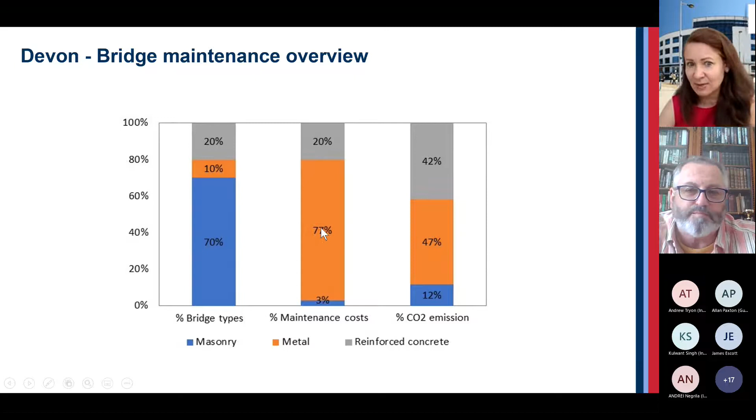This is crazy. And then in terms of CO2 emission, I looked into that. Masonry is about 12%, metallic is 47%, and reinforced concrete is 42%. So a little takeaway from this: maintaining masonry bridges, as you probably know, is not expensive - it's actually the cheapest, and the CO2 emission is much lower than anything else.

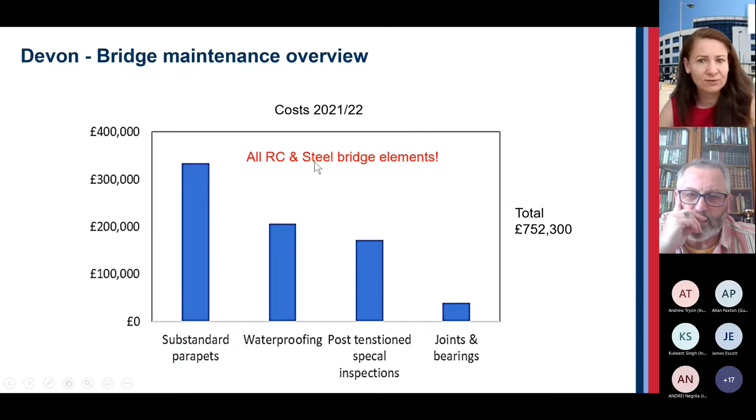So this is just a brief summary of what the maintenance cost is mostly spent on: substandard parapets, waterproofing, post-tensioned inspection, joints and bearings. They're all related to steel and reinforced concrete elements, so masonry doesn't really feature much here at all.

So we all know how long these bridges last, and the last two examples you may or may not recognize. Pont du Gard, I'm sure you do, which is 2,000 years old, and the next one is in Rome, St. Angelo, again built by the Romans. So we have clear examples of masonry bridges lasting 500 years or 2,000 years.

So clearly long lasting. Now, I haven't really come across any new bridges. There have been some brief replacements, particularly in canal bridges, but very, very few, if any, at least in England, and I'm not familiar with Scotland, which are newly built.

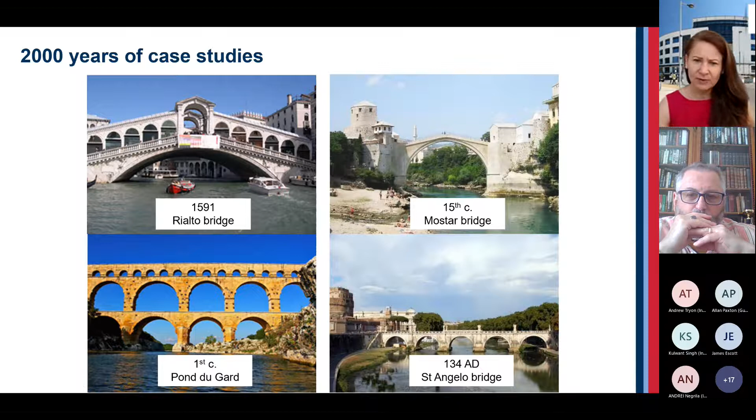Now, I came across a project - well, they haven't been built since the 1920s, so the technology is basically 100 years outdated, and people think that they are too expensive and difficult to build. Now, someone contacted me from Tanzania, actually a Belgian engineer, because they've got an incredible project building 70 new stone bridges.

If anyone has seen any pictures of this, you'd recognize that. Enabel is the Belgian Development Agency. They've got an agriculture project in Tanzania, and within this project they are helping people get to markets.

Working way out in the countryside, they're helping local communities build stone bridges using local resources, obviously. So the initial idea was to build bridges, but after looking into the cost, it was impossibly expensive to build concrete bridges. There are some amazing people in Tanzania among the Belgian engineers and agricultural people.

One of them has been building these bridges for 20 years in Kenya and Tanzania - quite incredible, no one has ever heard of that. So they initiated this project and they're now building 70 new stone bridges in Tanzania, in the northwest region, and the project has been very successful.

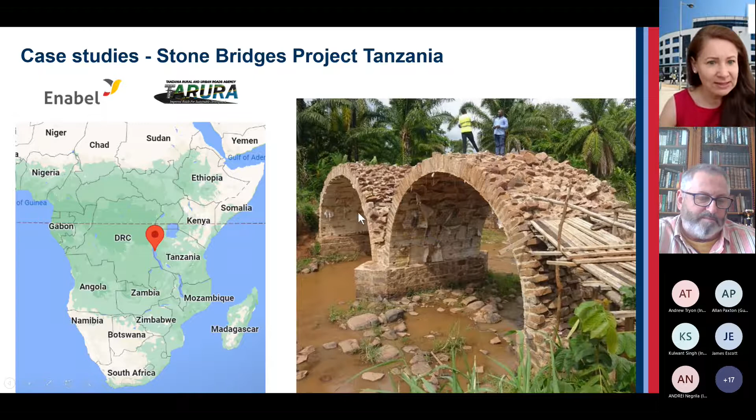So they are now starting to build stone bridges all around the country. That means 70 built within a 2 or 3 year project, and now they're rolling it out all across Tanzania - literally hundreds of stone bridges coming up. I was very interested to go there in November last year and see how they're actually doing it.

Everything is done by hand. There's no electricity on board, and they're obviously using very simple technology - long tapes for setting out.

The local community provides the stones and digs the foundations. The Belgians then pay for stonemasons to build the bridges, and they keep very strict quality control during construction.

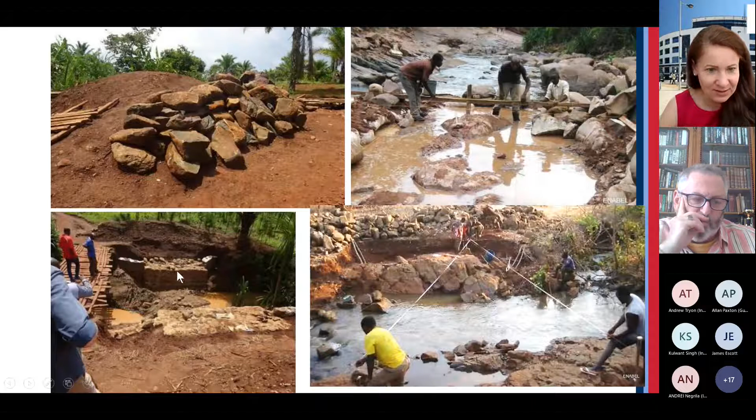So here the foundations have been dug and built. Next step - this is just a step by step. The Belgians provide the centering, deliver it on site, and this is the set for one 8-meter span arch bridge.

Because it's quite a long span, they bring it in 2 sections, one on the left, one on the right. They put it together on site and put it up. You can see the alternative, how local people would cross the river otherwise.

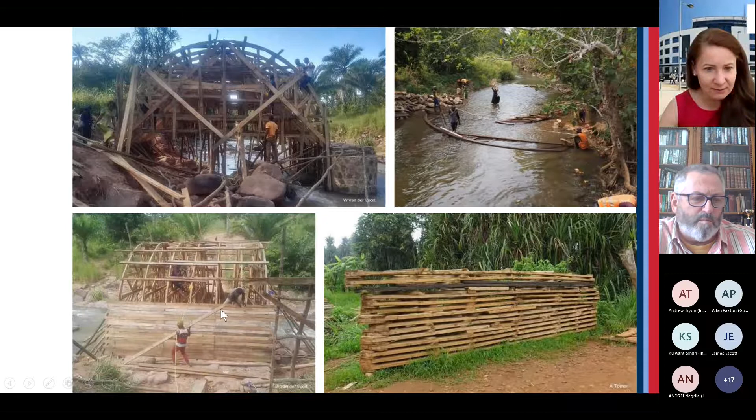They put the sections up - these are sections they secured - and they start putting planking on. After that, they start building the arch.

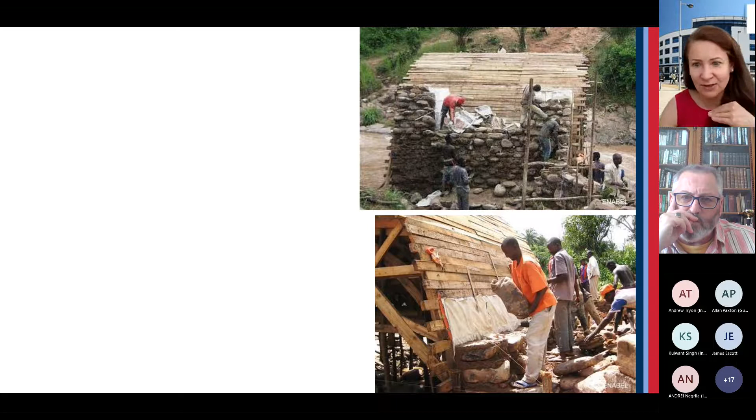They are very conscious about making sure that the largest stones are used for the arch ring, and anything smaller above that. They're also very conscious about making sure there's a 90 degree angle to make sure all the stones are in compression. Here the arch ring is nearly completed, and the last bit is then put in.

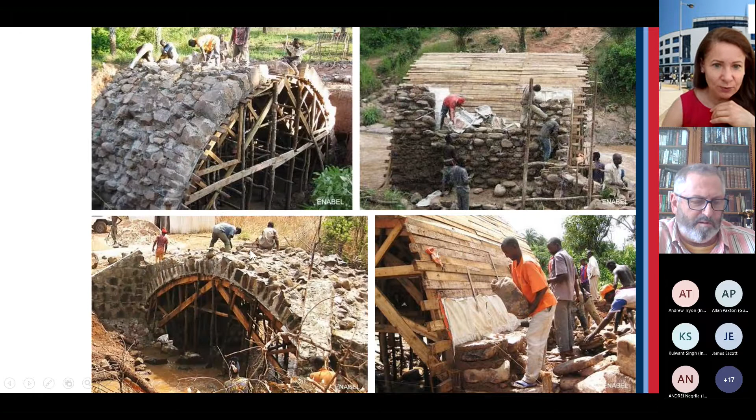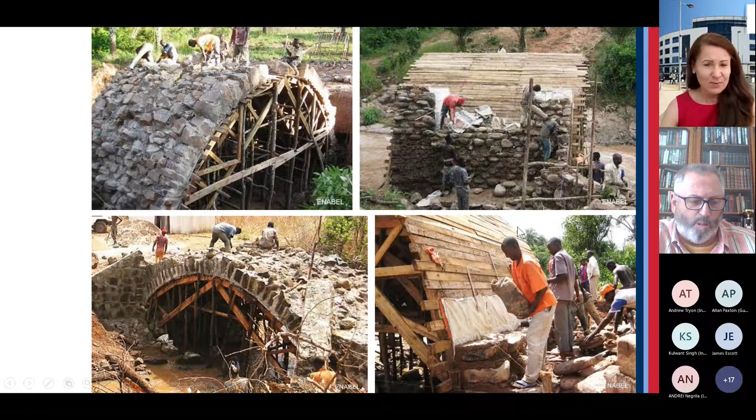It's quite interesting when you talk about what's the ring thickness - it's not easy to estimate. Once they're given the design for the arch with the minimal ring thickness, they try to use stones larger than required, so hopefully most are greater than necessary. However, what the effective arch ring thickness actually is, is really hard to estimate, so when analyzing it you just make the best estimate you can.

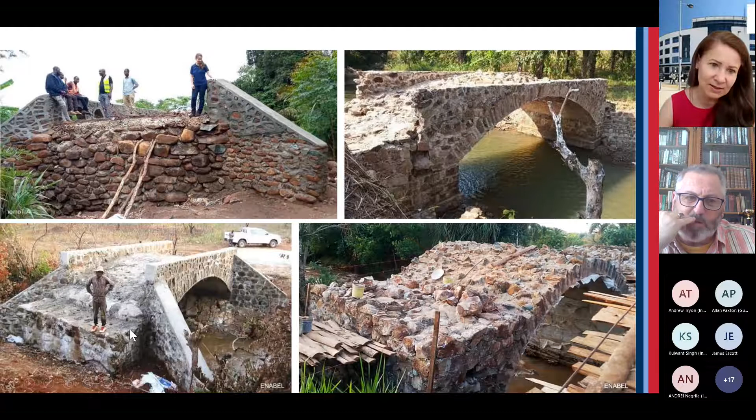Here the arch has been completed and the backing put up. Here the parapet's built - they use very small parapets, but it's just Tanzania. Here's one of those pictures you rarely see, before the bridge is filled up. Here they've got more backing, and then backfilling.

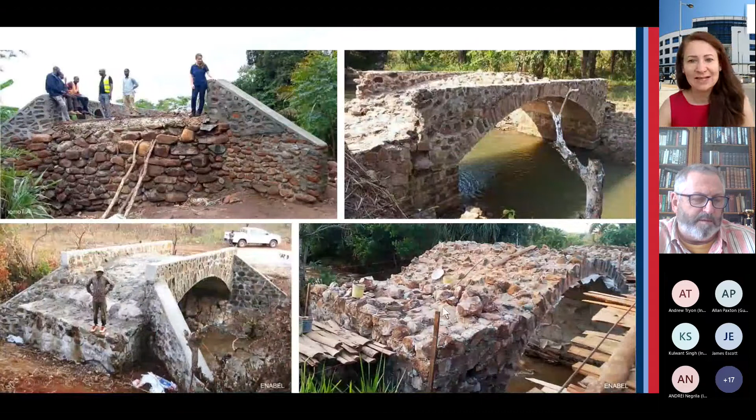And then here's some completed bridges - beautifully built, a lot of them 8-meter span, some smaller, some multi-span. Incredibly well-built bridges, they keep very strict quality control. In one case, I haven't got a picture, but the stonemason didn't put enough mortar between the stones, so they were very keen for that to be taken apart and built properly.

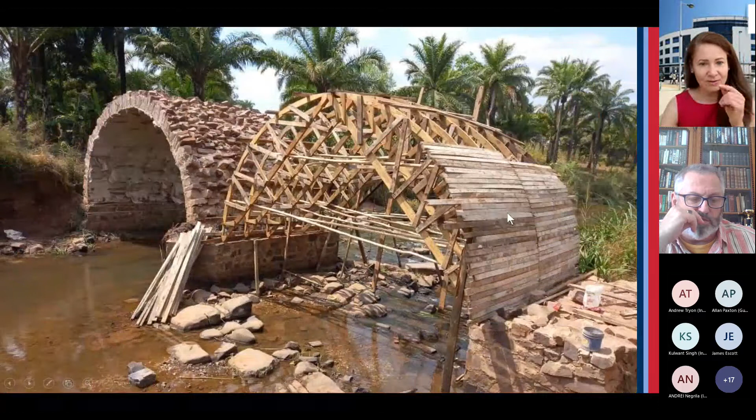What else? Right, this was the two pictures - this one was taken, and this one soon after. How many days or weeks or months do you think passed between the two pictures? How long do you think an arch ring takes to build? 6 weeks? Someone said 6 weeks.

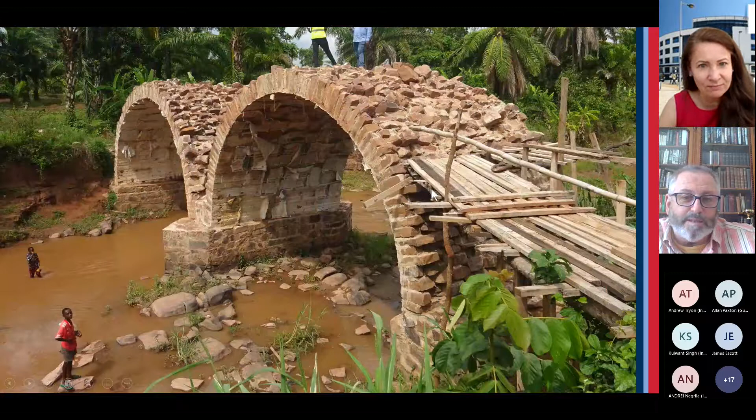Yeah, actually it's 11 days. So they had to finish the planking and then build all the stone, everything done by hand, in 11 days - basically a week and a half to build an arch ring. It's surprisingly quick.

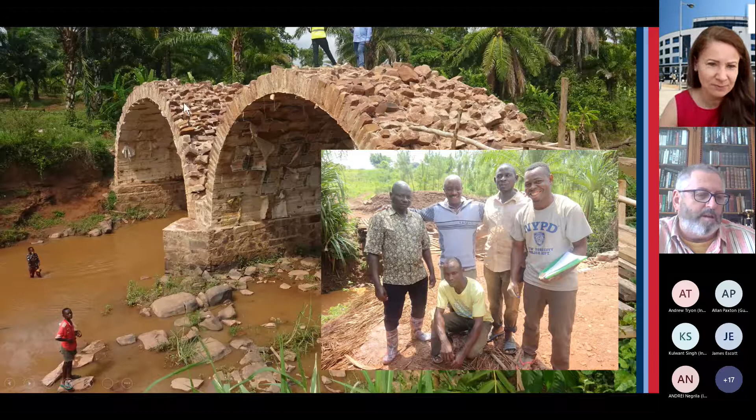So basically 5 guys on site do everything by hand, with the odd helper, but that's the team. They build a bridge in about a month - since this one's 2-span, it might take 6 weeks or 2 months, but certainly not longer. The only reason it would take longer is the monsoon season, when the water level rises by about a couple of meters within hours and they have to stop.

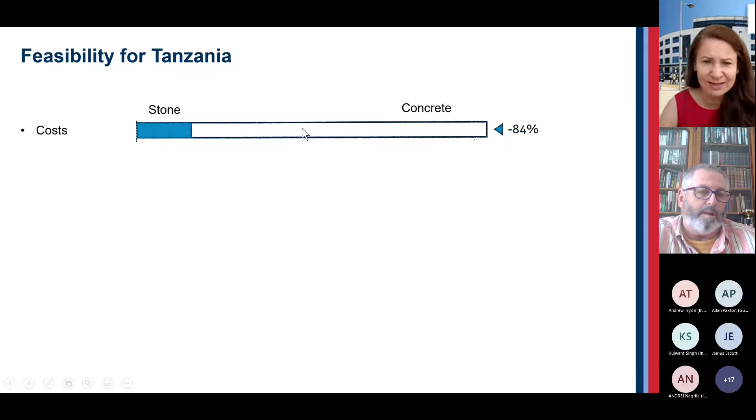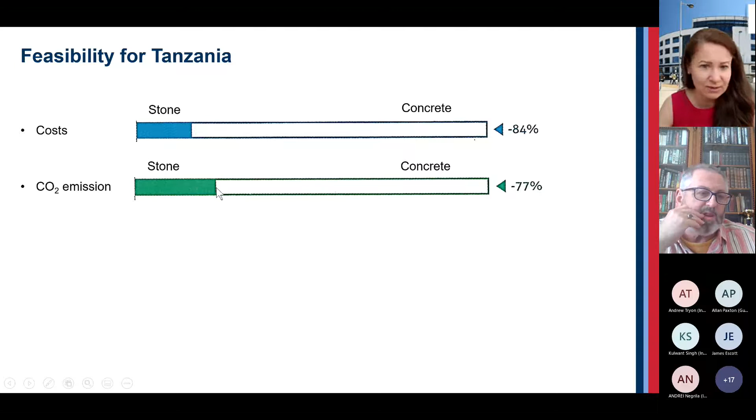This is one of their first bridges, and it was really interesting, really well built, amazing. I mentioned why they selected this type of construction - it was because of cost. Stone bridges cost about 84% less than concrete would, that's in Tanzania, obviously not the UK. Associated with this, CO2 emissions are about 77% lower than concrete, so it's a secondary benefit, but the primary benefit is the cost.

Now, that's a developing country - how is that relevant to us in the UK? When I lived in Bristol, I came up with a proposal to build a stone arch bridge in Clifton, on the Downs, connecting the 2 parts of the Downs park. We got planning permission - that was the first big stone bridge that received planning permission in, I don't know, 100 years, so they were delighted to get it.

The project was then stopped because of another permission we needed, which was to do with the status of the Downs rather than the bridge - they just didn't want anything built on the Downs. The design was for 3 times 14-meter spans. The bridge would have been strong enough for standard highway loading, or it could have been a pedestrian bridge.

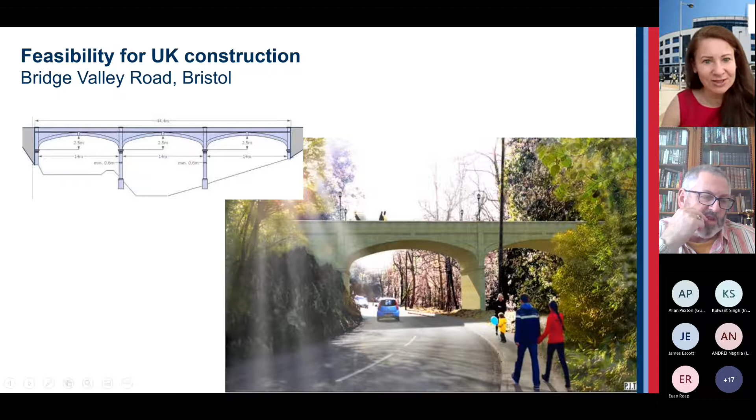I worked on this project on a voluntary basis for 5 years - put the plans together, did the consultation, submitted the plans. It was a really good learning exercise to see where we are with stone bridge construction. Basically no one has done it - anyone who built a stone bridge has basically died, because the last bridges were built in the 1920s. So no problem, we can relearn it - it's just a matter of finding the technology and how to build them.

I looked into the costs, because one immediate thought people might have is that it costs too much. Because none have been built over the last 100 years, it's very hard to estimate - the estimate for a steel bridge for that particular bridge would have been about £1.5 million.

If we built a brick arch bridge, brick masonry, it would have cost roughly the same. If we selected cut stone, it would have cost about 30% extra. So the additional cost is mainly materials and some labor, but labor actually isn't that expensive. You only need a small team.

So it would have cost probably about 30% more. However, stone bridges would last 300 to 500 years, I estimate. Brick masonry might last 200 to 400 years, and steel 100 to 200 years or so, rough estimate.

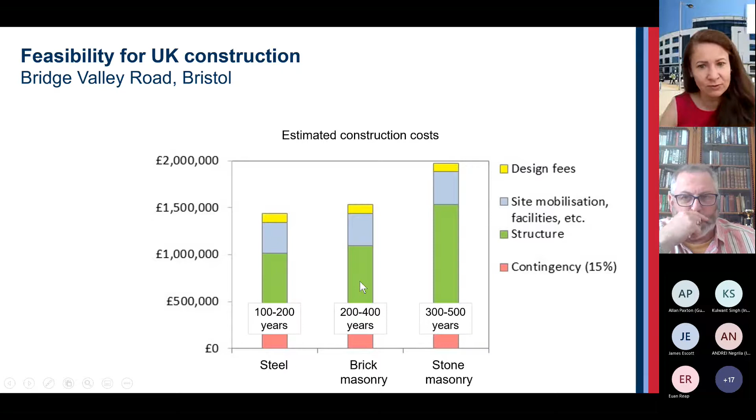Now the government is really keen on embedded carbon. What they're not keen on is actually looking at how long we are building for. I think it makes a difference that you are building something that's going to last 300 or 500 years, instead of something built for 50 years that's potentially going to have a whole load of problems after that.

If you look at the long-term costs per year, the slightly cheaper steel, well, the standard steel would actually be much more expensive if you spread the cost over the life expectancy. So this is one of the issues I'm very keen for government to reconsider, how sustainability is evaluated.

Embedded carbon, to me, makes very little difference in the long term. If anything, it can be counterproductive. We want to make sure things last to avoid lots of maintenance and replacement. Let's build something good quality, requiring low maintenance, that's going to last. And it's much easier to deliver that out of masonry, particularly stone masonry, rather than concrete or steel.

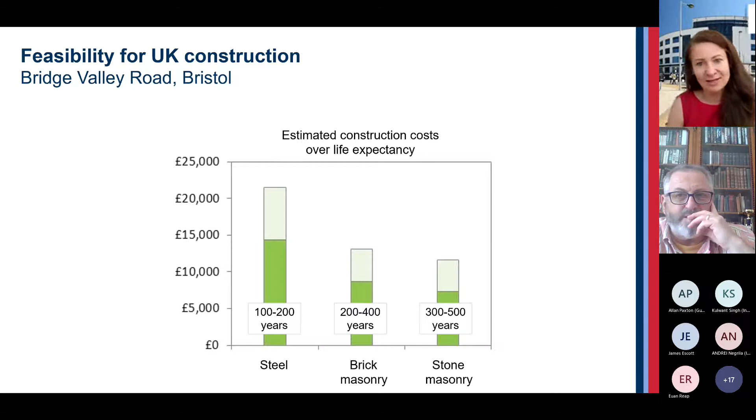Obviously masonry doesn't fit everywhere, so you might have the opportunity to build small masonry bridges, but if you've got a 100-meter span, obviously that wouldn't be applicable. So I'm not suggesting we need to replace concrete and steel with stone, because that wouldn't be true, but I'm suggesting stone has the potential to be used wherever it is suitable.

Looking at environmental impact for maintenance, steel and concrete have roughly the same CO2 emission over the maintenance phase. I'm not talking about embodied carbon, I'm talking about maintenance during the estimated, let's say, 120-year life expectancy, and masonry is about a quarter.

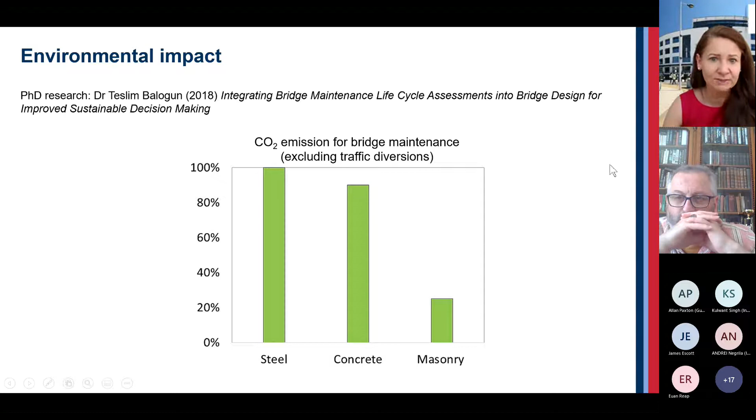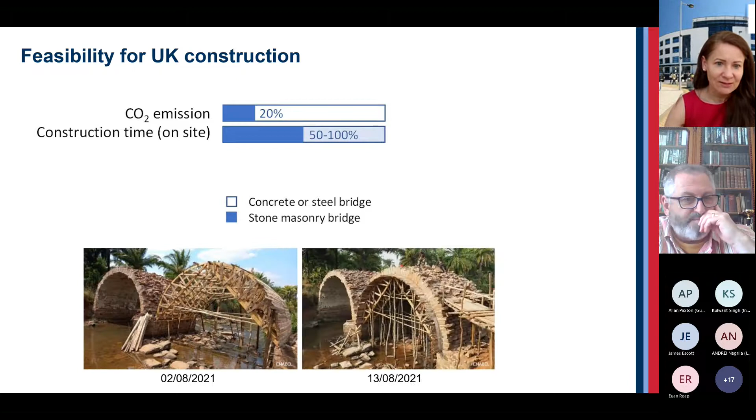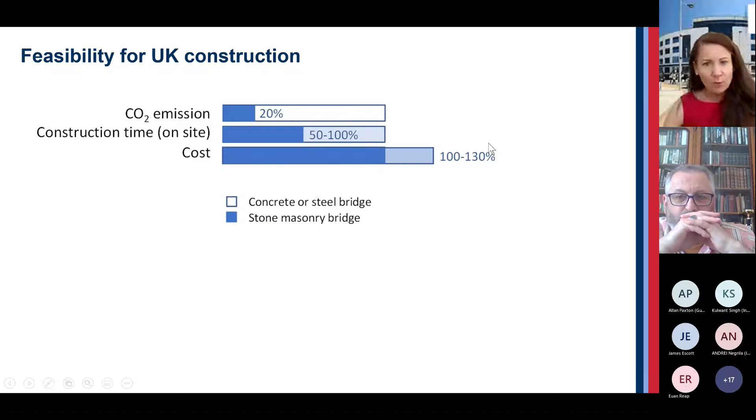And the third aspect, costs. I mentioned about 30% extra, perhaps, but what if you are out in the countryside and you haven't got cut stone, but you've got rubble? Rubble is just as good. So you could use waste material from quarries to build stone bridges, similar to the Tanzanian designs. The cost of stone will be minimal.

You can almost get the stones for free, because a lot of the quarries who produce cut stone can't use a lot of the waste. So the waste is about 40% of cut stone production. So 40% of all stone is put back into the ground.

Now you could probably get it quite cheaply. And for random rubble arch bridges, it doesn't matter what size the stones are, as long as you've got some large ones which you use for the arch ring, and you put the smaller pieces on top.

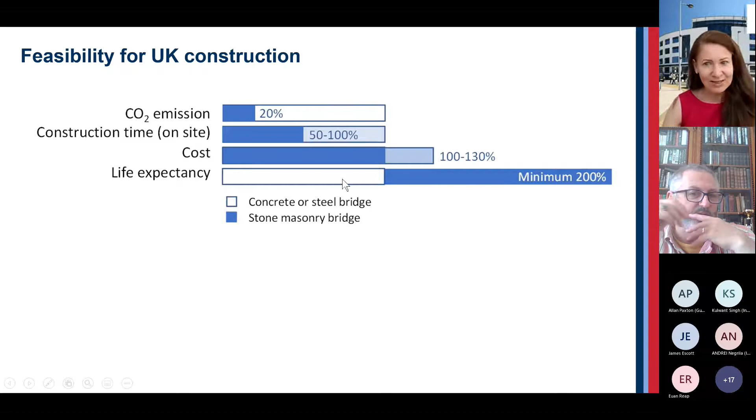Life expectancy I mentioned, and it lasts probably twice as long.

Now, how does it fit in, and what is the business case? If you like masonry bridges, it might be challenging to persuade someone who doesn't know anything about stone bridges why this might be feasible, or that this might help, in terms of environmental impact. So that's an upcoming aspect, obviously, for any construction.

So environmental impact needs to be realistic. A 120-year design life doesn't fit all. It might be realistic for concrete or steel, but why 120 for masonry, when the Victorians built to last forever? So I think the life expectancy must be included into any new design.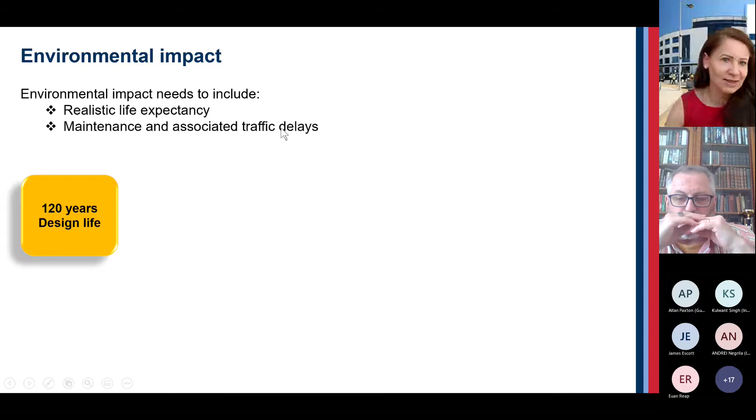But it has to be a realistic design life, not the design life on paper. We also need to include maintenance and associated traffic delays into any estimate for environmental impact. So instead of using the 120 years design life for estimating environmental impact, my suggestion is to estimate the real life expectancy, whether it's 50, 120, or 300 years, and use that to evaluate the environmental impact. This must be included somewhere in the design.

It's not policy at the moment. There's actually no central policy on how to do it. There are suggestions, but most of them focus on embedded carbon. Maintenance tends to have actually the same carbon impact as the embedded carbon, so reducing the embedded carbon endlessly doesn't really make much sense.

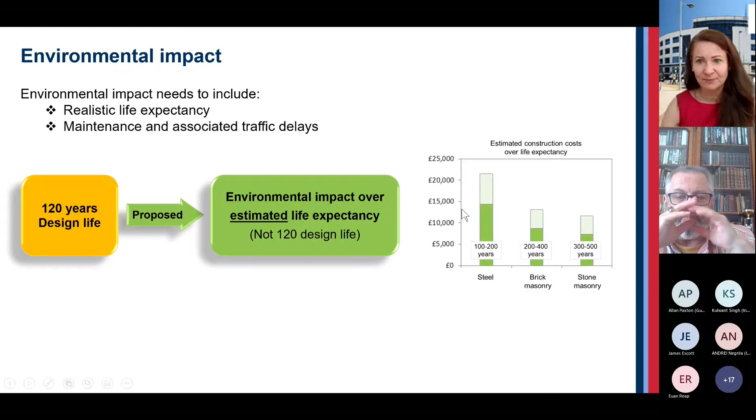And you've seen this picture previously. So it's okay - in terms of a business case, you might argue that it is a long-lasting construction, it is low emission, but how can you actually do it?

It's so clever. You can give it to someone in a local village, and it tells them about the principle of stone bridges, how to build them, with lots of pictures showing correct and incorrect approaches, what to do, what not to do, how to build it step by step, how to build your stone bridge.

And then it also gives them tables, and the tables include everything - like how many wheelbarrows, how many gloves do you need, how much timber do you need. The centering is given to the local community for these constructions, so they build the centering, then take it down and take it back to the warehouse.

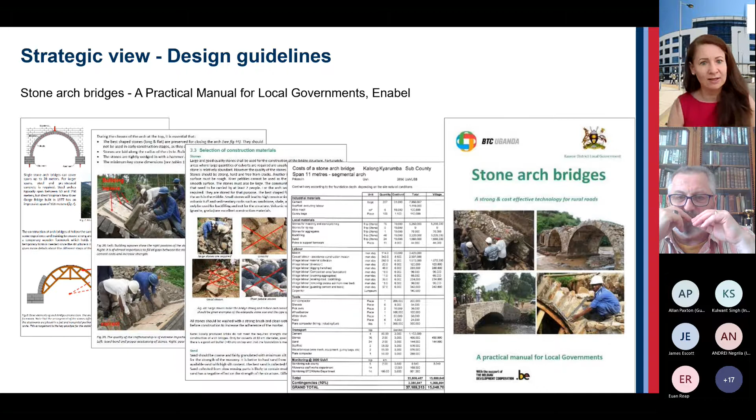Now, if you are interested in Scotland in starting to build these bridges to reduce costs, you might start to think - actually, if we have a few sets of timber centerings, we might be able to just borrow that for a couple of months, take it back, and someone else can use it. That would radically reduce your construction costs.

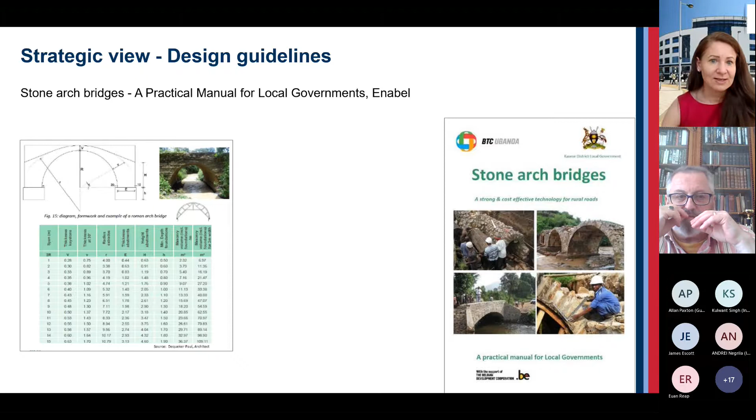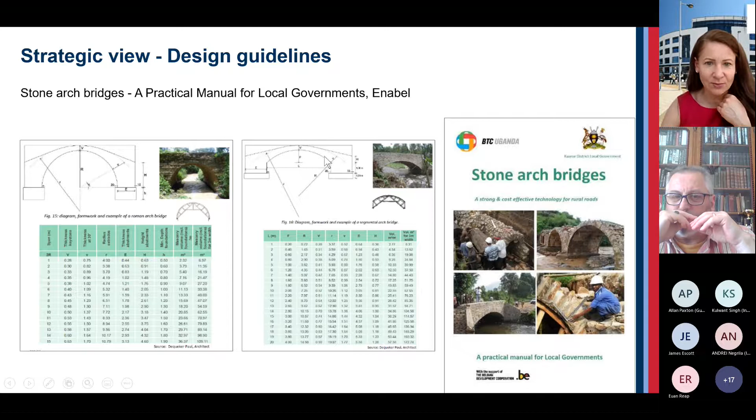And the best thing that they do in this manual is having those two tables - one is a table for semicircular bridges, and one is a table for segmental bridges. Let's have a quick look.

So here you will have the span, ring thickness is V, and then you've got the abutment lengths, the backing heights. So they give you all the information, all the dimensions you need, and that's what they use. So the Belgians, if they want to build an 8-meter span bridge, they can make it either semicircular or segmental, and here are all the dimensions. Incredibly simple, and that's what you need to make it easy for people to do it.

We are looking to organize a working group, and if anyone is interested, please let me know, to update this guideline to become an international one. Obviously materials and local requirements would be slightly different, but I think these tables and the whole setup of this design guideline are incredibly helpful.

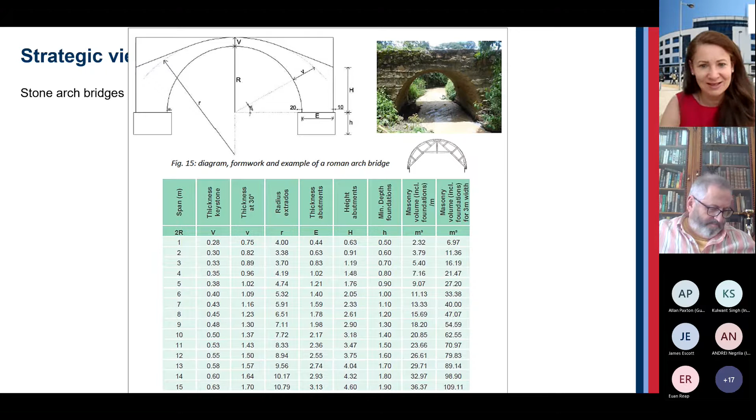So let's look more strategically to the future. Sustainability is well known, whole life costs - that's obvious - long life expectancy, obvious, and resilience. Traffic has gone up enormously since the Victorian times; those bridges are still serving today's traffic because they were over-designed. I think it's a good idea to over-design structures, but reducing everything, minimizing everything - which is the current trend in design and for architects, minimize everything - I think can be counterproductive.

For masonry bridges, the arch ring, like this, is the load-bearing element, and the thicker it is, the stronger the whole bridge will become, more or less. So it makes sense to make it slightly thicker so that you add an extra, I don't know, so many tons, and an extra 100 or 200 years of life.

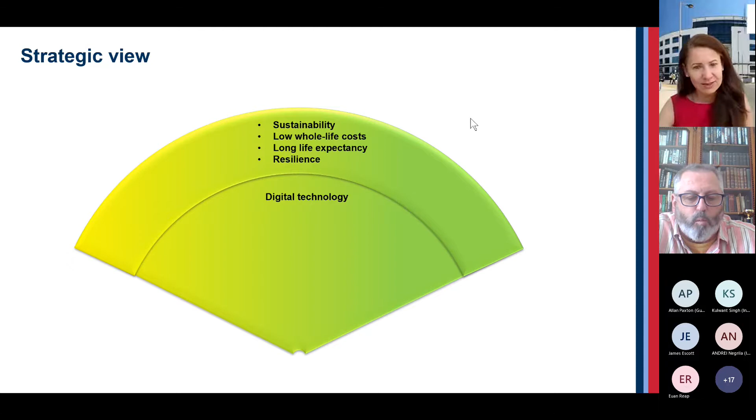What is missing, or only partially done, is the digital aspect of stone bridge construction. When these bridges were last built in the 1920s, the technology was pretty medieval and hasn't changed since. However, there's a whole range of potential technology which could be adopted, or has already been partially adopted, into the industry.

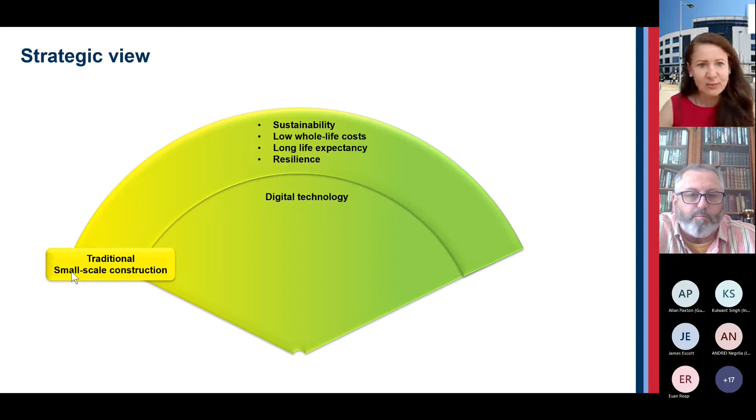We can look at the Tanzanian bridges and build small-scale stone bridges. That's not a problem, technology is not difficult. My aim is to adopt the technology to allow people to build at a larger scale, not bigger bridges necessarily, but more, and make it easy for people to build. That means we need to make the technology easy and the design easy.

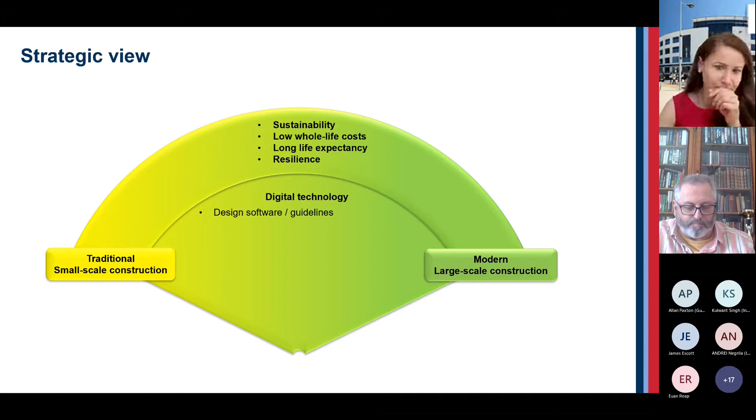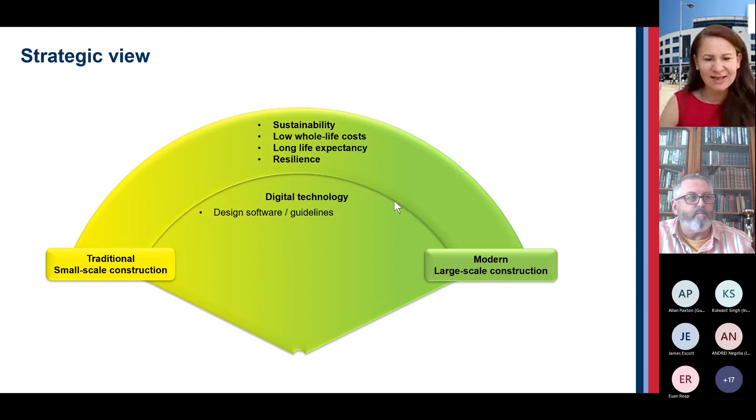I think what would help towards creating an opportunity for large-scale, modern construction is including design software and guidelines, so people gain confidence and get guidance on how to do this. Simple design software is the best way. There isn't really anything—Archie and Ring are the two dedicated masonry arch bridge assessment programs, which I'm sure you're familiar with, so you can use those to design bridges.

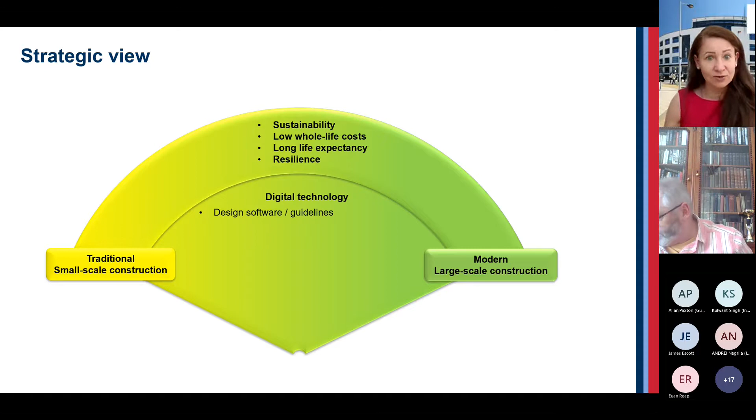We could think about developing dedicated design software for stone bridge construction, and this needs a little bit of development. However, we are not very far from that. It's really quite doable.

Now there's a lot of development in digitization and optimizing. I think there's a good opportunity here to also adopt it into quarrying, stone cutting, transportation, and construction. Optimization is being adopted in very many sectors, so we can just adopt it here as well.

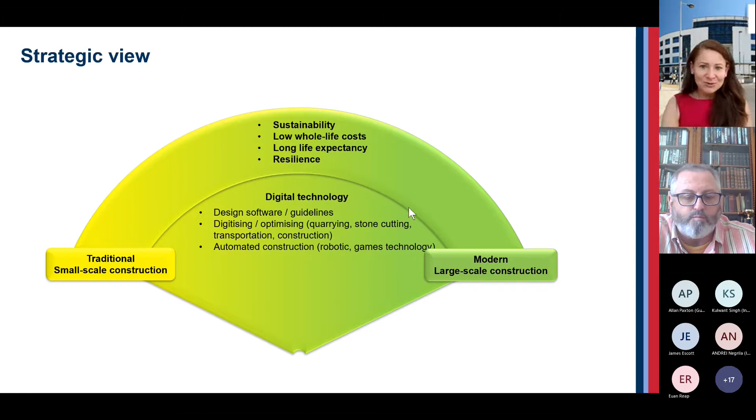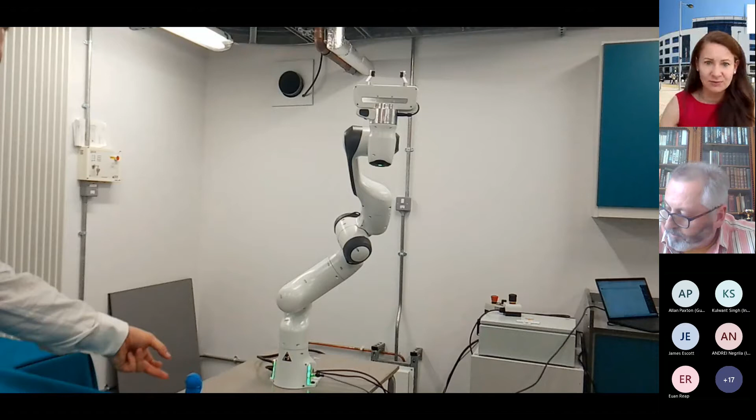Automated construction—it's really exciting. I'm talking to the robotics people here at Brunel University, and we're starting a new project. Let me just show it—to use robotic arms, this is just a model, to use robotics to build stone bridges automatically. So, automated stone bridge construction. This is one of the little robots that we have.

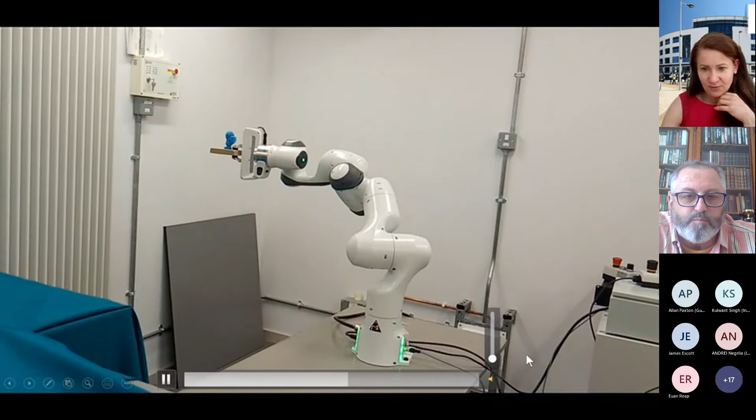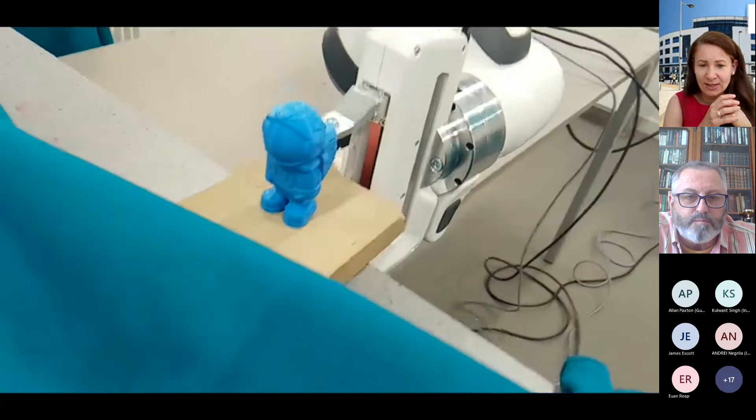And this concept is being developed—take the sound down. You can have a robotic arm that picks up stone and places it. If you put sensors in, you can make it do quite sensitive and gentle tasks. This is just one of those things that could easily be adopted, and we're developing a pilot study for automated stone construction for arch bridges.

Similarly, games technology might be an opportunity to incorporate. Using a joystick, you could build remote control—so there's very little reason sometimes for people to be right there. I'm sure we can adapt technology to help. The expertise, knowledge and ability of people could then be spent somewhere that technology can't deliver. I want to utilize human resources to make people do whatever they can really do, and scale up the technology rather than get people doing things that machines could potentially do.

Now, sensors could be adopted. I think sensors are very much adopted into concrete or steel bridges even today. However, my plans are to start including sensors into new stone bridges. Not that they're really critically needed, but it would be a useful feedback mechanism just to keep an eye on things. The government again is looking for digital technology, digital infrastructure.

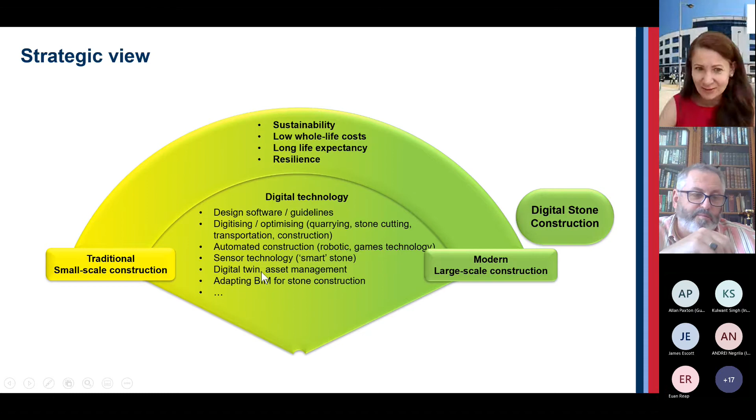If we start reintroducing stone bridges with sensors already built in, I think that would be a much stronger business case as well. We might incorporate digital twins and asset management development. BIM is not very easy to adopt for stone construction, but it might just need a little bit of research and development to be able to do that.

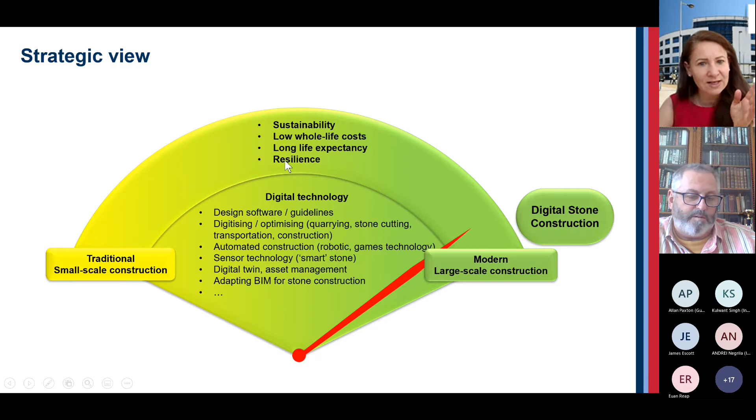So where are we at the moment with this technology? In terms of 0 to 100, I think in terms of sustainability, life cycle cost, life expectancy and resilience, we are very high up. Concrete and steel would probably be lower down somewhere here. And what about digital technology—how far is digital technology included in stone bridges? I think there's already a lot being done.

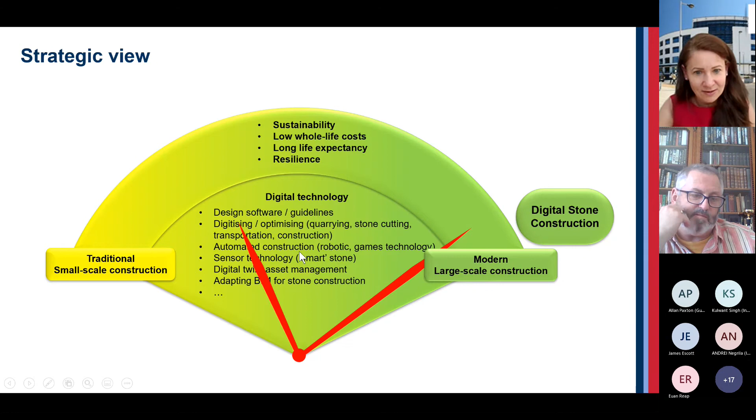For example, stone cutting, CNC machines—they are obviously very much automated. So there's a lot of digital technology included already, but I think there's a lot more potential to bring it up to speed with anything else and go beyond any other building method or building material.

So if anyone has any opportunity to pilot the scheme in the UK, please let me know—I would be very interested to hear from you. We are looking to build the first stone bridge in England in Devon next year with Kevin Dentis. He's just looking for a suitable location, and it will probably be about an 8-meter span bridge.

So if you've got any opportunity, either rebuilding or building a new one, and you'd like some help, or you'd like to work with people who are also interested in initiating new stone bridge construction projects, let me know, because we are all here to actually build up the expertise and help each other. Thank you very much.

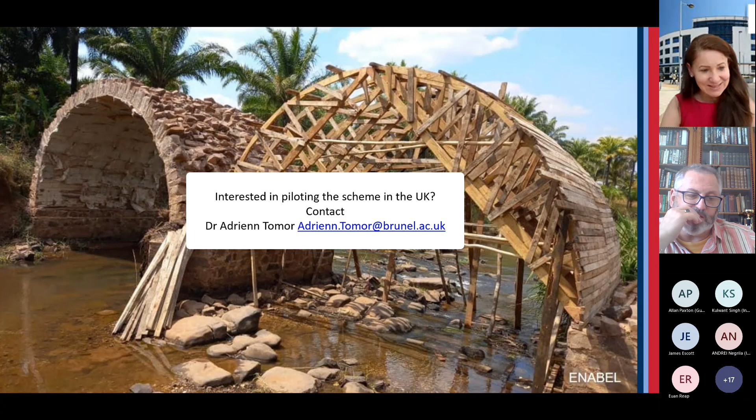Do we still have anyone left? There's a lot of us left.